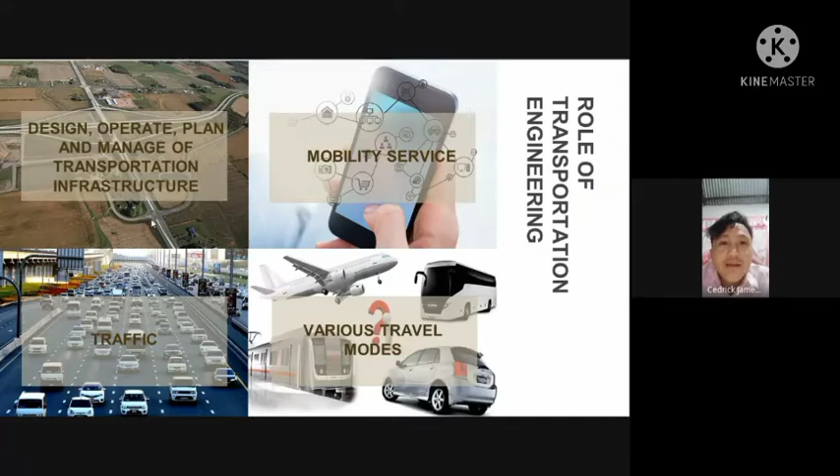Next is the role of transportation engineering. It is the application of technology and scientific principles to the design, operation, planning, and management of transportation infrastructure, mobility, service, traffic, and travelers for various travel modes, in order to provide safe, efficient, rapid, comfortable, convenient, economical, and environmentally sustainable movement of people and goods.

So the importance of transportation engineering will be discussed to us by Renz Oliver Paguiligan. Hello, good morning everyone. By the way, this is Renz Oliver Paguiligan and I will be reporting about the importance of transportation. How important is transportation?

The importance of transportation to a country is comparable to the veins in the human body - that's how important our transportation is, like veins. For example, if we had no veins in our hand, nothing would transport blood, and if nothing transports blood, our hand wouldn't function either. Just as veins help maintain the health of a human, similarly, transportation keeps the health of a nation in good condition by keeping people and materials moving from one place to another.

So here are sample examples of the importance of transportation. Number one, they play an important role in the economic, social, and commercial development of the country. In economics, for example, food transport. In social aspects, like events and parties, we really need transportation to get there - we can't just walk if it's far, though if it's near, we can. And in commercial aspects, transport of materials.

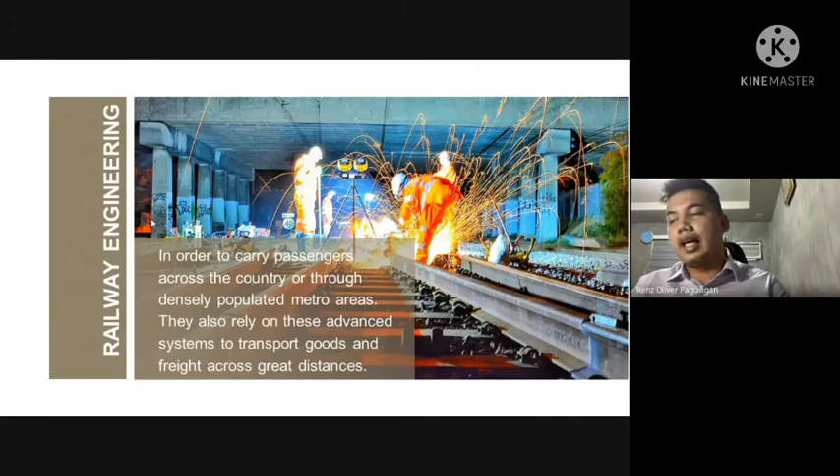Ayun nga po, from distance to distance. Example, from North EDSA to Makati, pwede mo siyang makuha ng mga 30 to 45 minutes sa isang sakayan lang sa tren. Pero kung nag-try ka ng vehicle tapos rush hour, ayun, tatagal ka talaga ng 1 to 2 hours, o pwede pang mas example 3 hours o sobra pa kung grabe ang traffic.

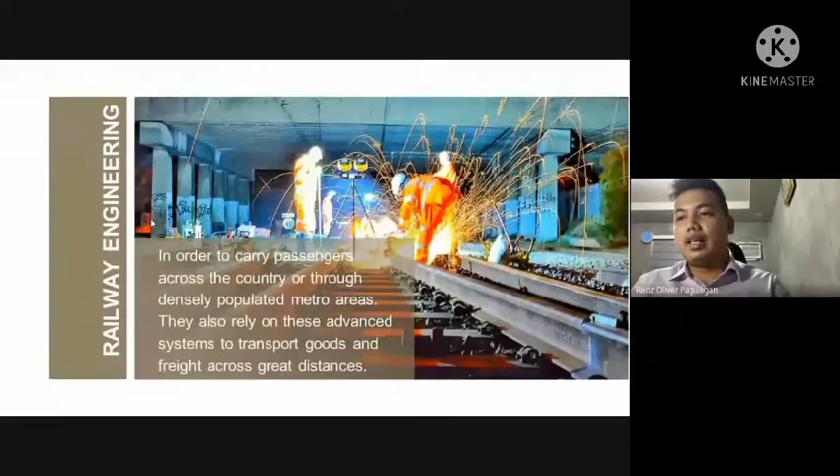So railway engineers, not to be confused with the engineers who pilot trains, must know how to plan routes and understand the complexities of busy modern rail travel. Kumbaga, mas alam nila kung saan natin nilalagay yung trains o ano yung mga ruta nito.

Para sa example kung saan mas maraming tao, sa Cubao, kailangan ng station sa gitna ng Cubao, sa gitna ng Ortigas, sa gitna ng Makati, kasi yan yung ating mga central business district. Unlike sa mga malalapit lang doon, halimbawa may mga may-ari ng kumpanya na malalapit na sila doon. Unlike naman sa mga employees lang, example from Cubao, tapos yung work mo ay sa Makati, kailangan mo talaga ng train para mas mapadali ang iyong biyahe.

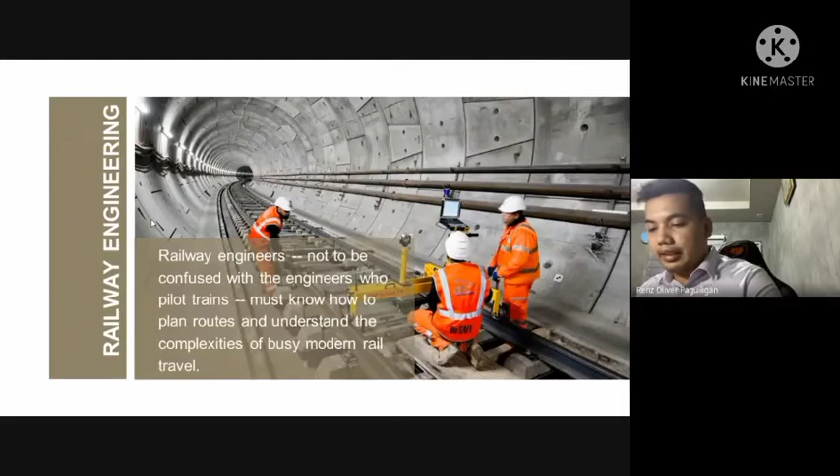So next natin is Port and Harbor Engineering. Okay, ito rin po yung isa sa pinaka-importante sa atin, katulad ng pag-connect sa countries.

Example, shipping, commercial fishing, passenger cruises, and private sailing all require docks and harbors from which to sail and deliver goods and passengers. Yan ay kailangan talaga natin ng docks and harbors. Hindi naman pwedeng yung ating pagdadaungan ay lupa lang, hindi siya kaaya-ayang tignan. Tsaka mas maganda talaga yung may mga docks na tayo para sa pagdadaungan ng mga goods at mga pasahero.

Engineers specializing in ports and harbors plan, design, and oversee the building of wharves, docks, piers, berthing facilities, marinas, bulkheads, and seawalls. Port and harbor engineers also design, build, and maintain boat launch facilities and coastal access areas, and provide inspection and survey services for seaway transportation companies.

Ayun po, ang mga engineers ay nagde-design at nagbi-build din ng mga magagandang facilities katulad ng mga docks. Kasi syempre, ito rin po yung, halimbawa galing sa ibang countries papunta sa Pilipinas, edi syempre mas maganda po yung ating daungan, mas gaganda yung tingin nila o mas babango yung pangalan ng Pilipinas, at kailangan din ng safety para sa ating pagdaong o paggaling sa mga barko.

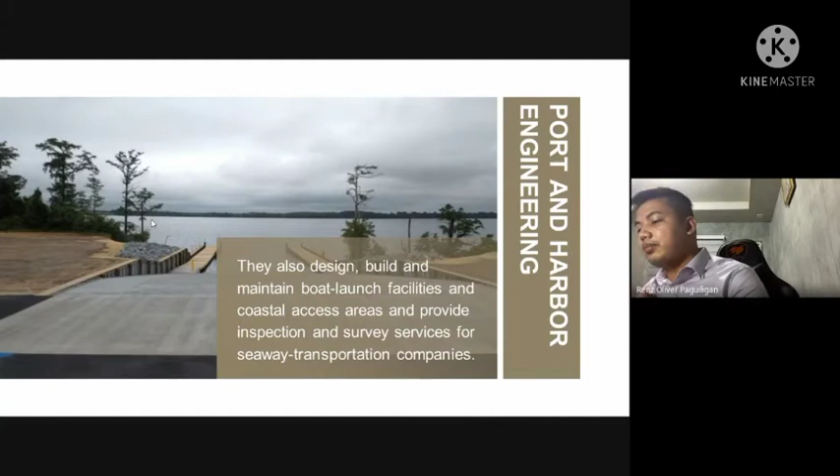Ayan, and coastal access areas, inspections, service. So ayun lang po, importante po talaga ang ating transport o transportation.

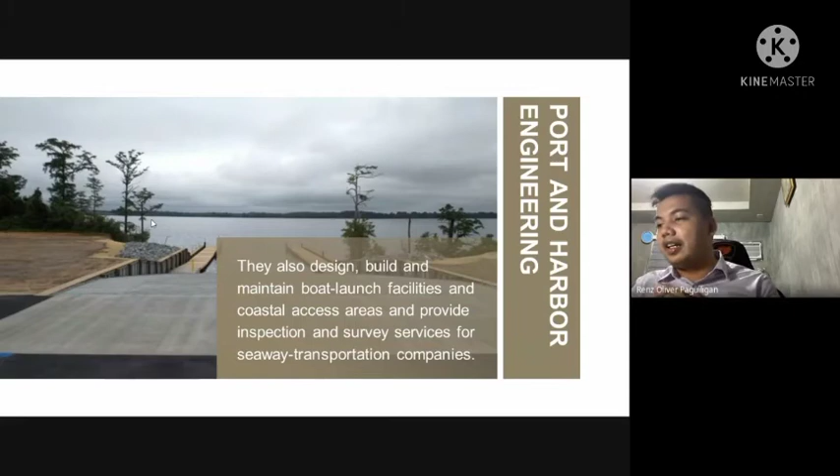Thank you. Airport engineering. Airport engineers design, build, maintain, and develop construction standards for such as commercial, private, military and civilian airports, heliports and helipads, and seaplane bases.

They must adhere to federal laws concerning materials, security, lighting, markings, and signs. They also must take into account any wildlife dangers such as birds that could interfere with departing or arriving flights, and stay abreast of evolving technologies related to air traffic.

Yung airport engineering, sila yung magde-design, yung nagma-maintenance, tapos yung nagde-develop.

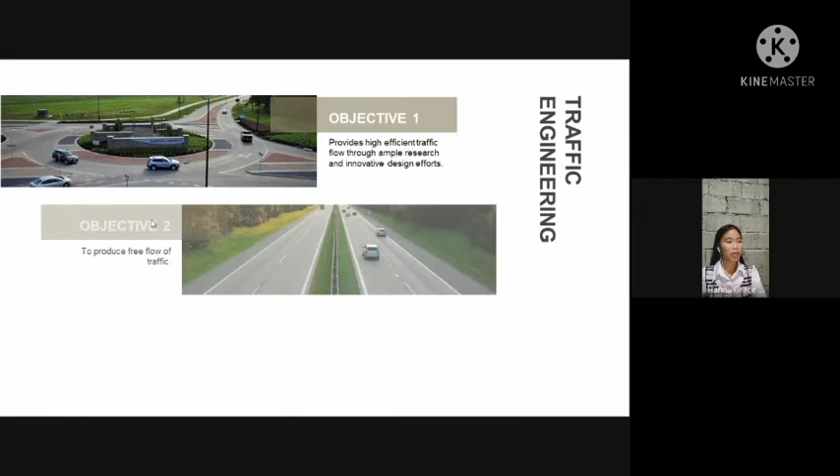Yung second objective nila is to produce free flow of traffic. As I've said earlier, yung mga traffic engineering, sila yung may kinalaman kung bakit nagiging maayos yung daloy ng trapiko. Hindi man ganun na nawawala yung maraming traffic, pero at least umaayos.

Ang third objective nila is to use research to design roadways and highways that increase traffic safety. Sinabi dito na yung mga traffic engineering, sila yung may kinalaman kung bakit meron tayong mga nakikita na mga traffic signs, mga traffic lights, at kung ano-ano pang mga bagay na nakikita natin along the highway. Sila yung may kinalaman kasi nagre-research sila.

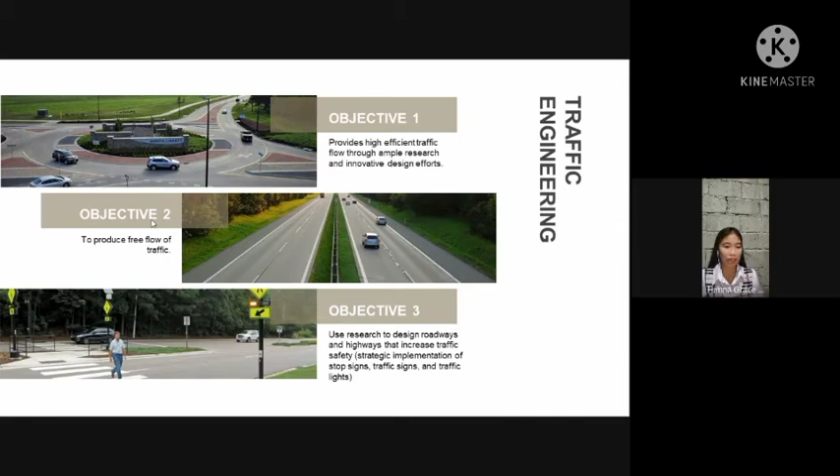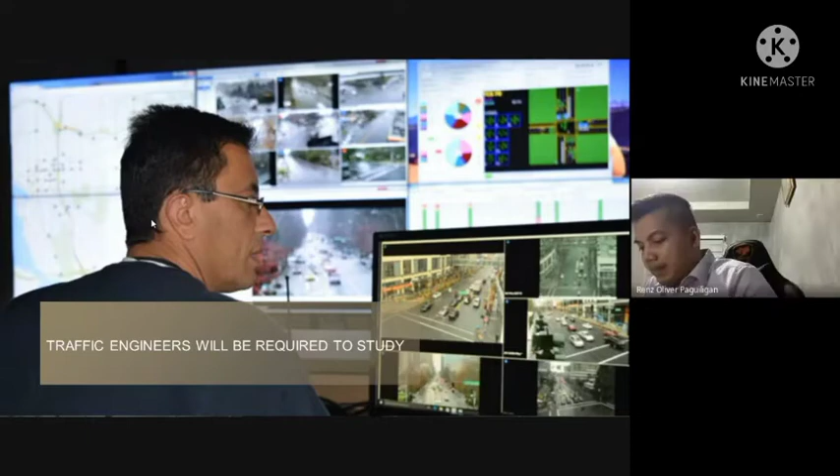Usually, to successfully implement the above-mentioned objectives, traffic engineers will be required to study an abundance of data, research, and literature on the characteristic of traffic. They are required to study the accident studies. Ito, sila yung may kinalaman or sila yung nag-aaral kung bakit nagkakaroon ng isang aksidente sa isang lugar or sa isang highway. And they also study about the traffic capacity.

So ano nga ba yung traffic volume study? Yung traffic volume study, about siya sa kung ilang vehicle yung dumadaan along the highway. Sila yung may kinalaman sa pag-study nun. Pinag-aaralan din ng mga traffic engineering yon.

And then, they also study about the parking. Kung ano ba yung maganda at pinakamainam na parking style or design para sa mas efficient na traffic flow or para hindi magkaroon ng ganong aksidente. And they also study about the origin and destination studies. It is about kung saan nanggaling yung isang sasakyan at saan siya papunta.

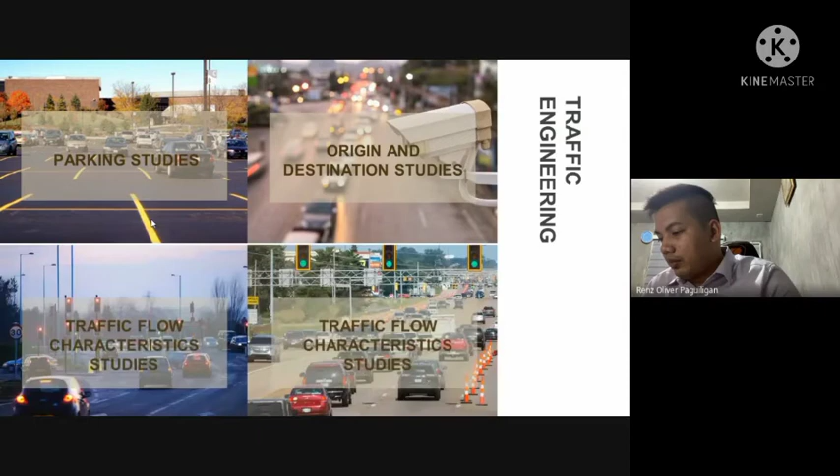And then, they also study about the traffic flow characteristic studies. Etong traffic flow na to, ito yung about sa mga kung bakit, halimbawa, kung paano nagkakaroon ng mga nakikitang mga traffic lights, mga traffic signs, tapos yung mga gamit na nakikita natin, yung warning sign, yung mga ganyan, sila yung mga nag-aaral nun, yung traffic engineering, kaya meron tayong mga nakikitang ganun sa highway.

And then, in addition to the enhancement of traffic flow, construction of roadways and installation of road signs and lights, traffic engineers also work hard to improve traffic calming in residential areas. So it means yung mga traffic engineering, hindi lang sila concerned about sa traffic flow ng isang roadway, kundi pati dun sa mga tao na nakatira doon. Kaya nagkakaroon tayo ng mga kapag nasa biyahe tayo or nakikita natin along the highway, may makikita doon, slow down, yung mga sign na slow down, this is school zone or church zone, yung mga ganyan. Kaya natin nakikita yun kasi ang mga traffic engineers, sila yung responsible sa mga bagay na yun.

May mga sign tayong nakikita along the highway para sa safety, hindi lang ng mga sasakyan na dumadaan, kundi para din sa mga taong nakatira malapit sa area na yon.

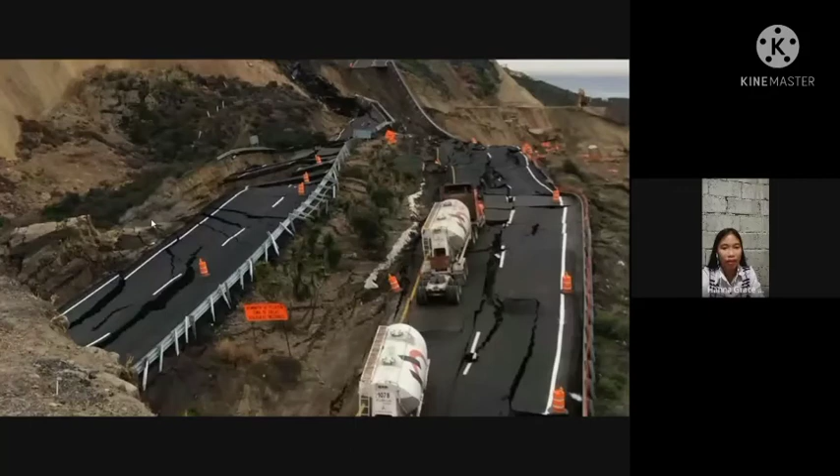Makikita nyo sa picture, kapag without traffic engineers, our roadways would be underdeveloped and unsafe while yielding high congestion and accidents. Kapag walang traffic engineering, magkakaroon ng maraming aksidente, magkakaroon ng mga bagay na imbis na safe yung mga tao, hindi sila magiging safe.

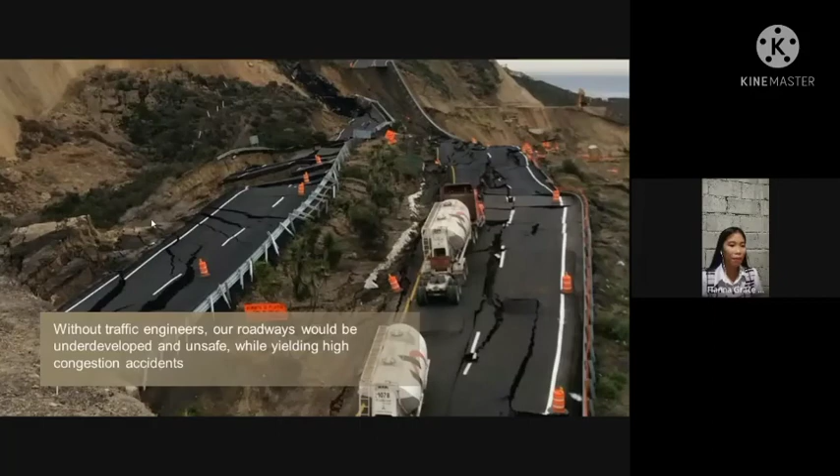Isipin na lang natin na kapag walang traffic engineering, katulad ito ng isang gobyerno na walang pamahalaan o walang rules na sinusunod. Magkakagulo yung buong bansa. Kapag wala tayong traffic engineering, magkakagulo din yung roadways at madadamay pa yung mga residenteng nakatira doon.

Our traffic engineers provide us with roadways and traffic signs that allow us to get from point A to point B with ease and safety. Sila yung responsible kung bakit tayo nakakapunta sa isang lugar ng safe and with ease, dahil sa mga traffic lights, mga traffic signs, at mga bagay na nasa roadway na nakakatulong para maging maayos at mas safe tayong dumaan, tumawid, or sumakay.

For frequently asked questions: Sir, what if we don't have transportation engineering? If that happened, we will be experiencing chaos on the roads, no order and no rules, and roads will be prone to accidents. Kapag walang traffic engineering o transportation engineering, hindi magiging maayos yung traffic flow natin at ganun din yung mga taong nakatira malapit sa roadway.